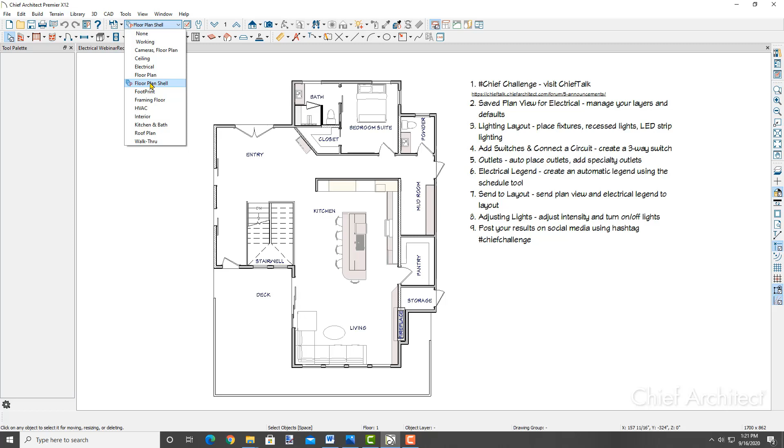So currently we are in this floor plan shell, and I'm going to change over to our electrical saved plan view. So in this electrical plan view, you'll notice that my screen has changed here. Things are turned off that you might not want to see in your electrical plan, and the things that you do want to see are turned on, such as the fixtures and connect electrical switches and so forth.

So if we take a look a little bit further into what goes into this Saved Plan View, in this drop-down menu right next to the Saved Plan View, we have an Edit Active View. So I'm going to click on that, and that will bring up this dialog box here. And I'll select the Selected Defaults panel. That's what I'm interested in.

And you'll notice here that I have a default set as my electrical, and what that means is we have these various defaults set up automatically. They're just configured so that when I draw dimensions when I'm in my saved plan view for electrical, they're going to go into the electrical dimensions layer. Text is going to go into the electrical text layer.

Markers and callouts will go into the respective electrical layer. You'll also notice at the bottom here that we have an electrical layer set, so this is where we control the display of things we don't want to see in this particular view.

Now if we click the Define button, we can go into the layer set, and this is where we can turn on and off the various things that you might want to display for your electrical plan. So I'm going to leave this as it is, click OK, and we're not going to make any changes here.

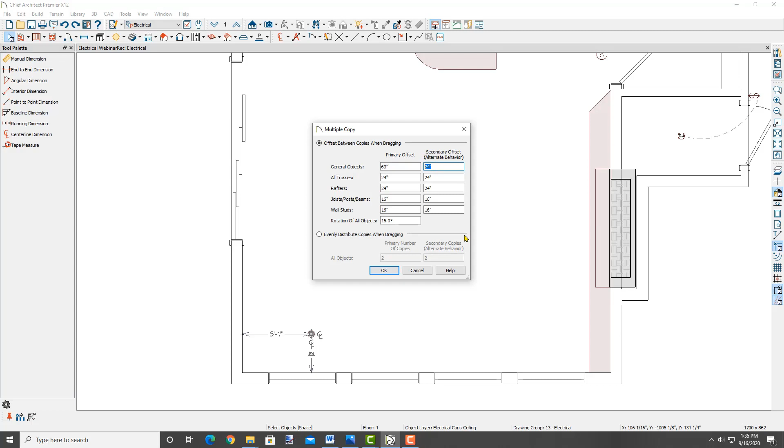The primary offset is going to be that 5 foot 3 inches, and the secondary behavior is going to be 6 feet. Okay, so when I click OK there, now I can come down and grab that multiple copy.

I'm going to drag that up, and you'll notice that I get a copy of the recessed light here and here. Then I'm going to release my right mouse button, and drag over, and I get those copies exactly at that interval.

And of course, we can confirm that if we just grab our center line dimension. I can drag a dimension down and see my 5'3" there. I can drag another dimension and see that 6 foot interval.

So that could be a handy tool when you're trying to lay out lights in a room like that and you're trying to figure out your spacing. For some, maybe that initial evenly distribute, and you might center that in the room and not worry about exact dimensions - maybe that's fine. If you want to go to the extra step of getting exact dimensions, using that evenly distribute and then setting an exact interval based on those measurements can be a real time saver.

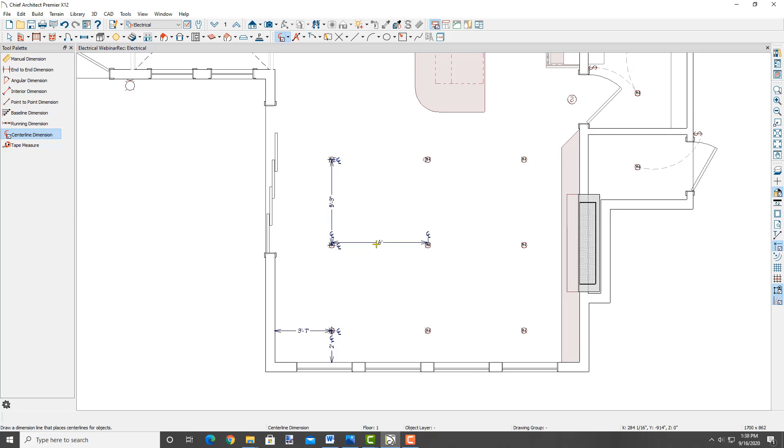Okay, so the next thing we're going to take a look at is putting some lighting over this island here in our kitchen. So I'm going to open up my library browser here. On the right hand side, I've got what looks like a stack of books, and you'll notice in the library browser we have several different layers here. We have a folder for core catalogs, bonus catalogs, manufacturer specific, and then we have our user catalog. So in my user catalog, I have some lighting already set up here.

So I often will set up shortcuts for the things that I use frequently in my designs, and I've narrowed this down to things relevant to this demonstration, specifically electrical and lighting. In my light fixtures folder here, I have a shortcut to this pendant light. Chief Architect comes with hundreds and hundreds of light fixture options in the core catalog, and you can also go out to the Chief Architect 3D library and download additional content there.

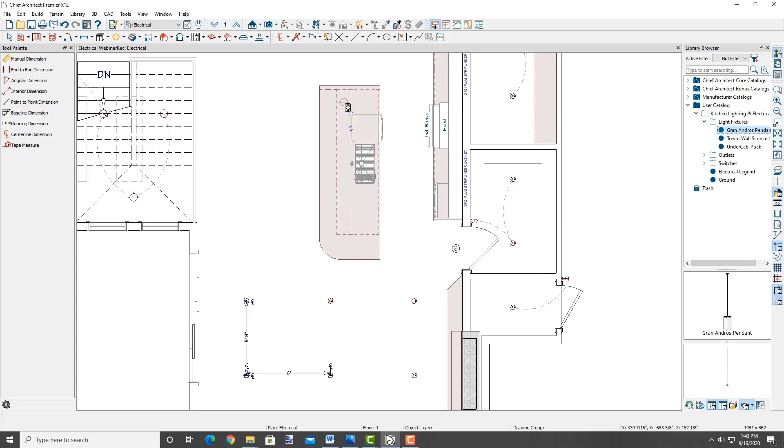So this pendant that I have, we're going to add over our island. I'm going to come into the island area, zoom in a little bit, and get a snap point to the center of this cabinet here. I'll bring that out and click, so I got that midpoint snap you can see with the blue dotted line, and I'm just going to click that pendant light down over our island.

In this case I know the interval. I'm just going to space these pendant lights out at 36 inches. With that pendant light selected, I'm going to click on my multiple copy and set that interval to 36 inches. I'll click OK, and then I can simply grab that and drag it out at 36 inches. That's good enough for our island here, and of course if we wanted to dimension that, we can do that as well.

Okay, so we've got our recessed lights here, we've got some pendants, and the next thing I want to add in terms of lighting is going to be some strip lighting, LED lighting, or rope lighting.

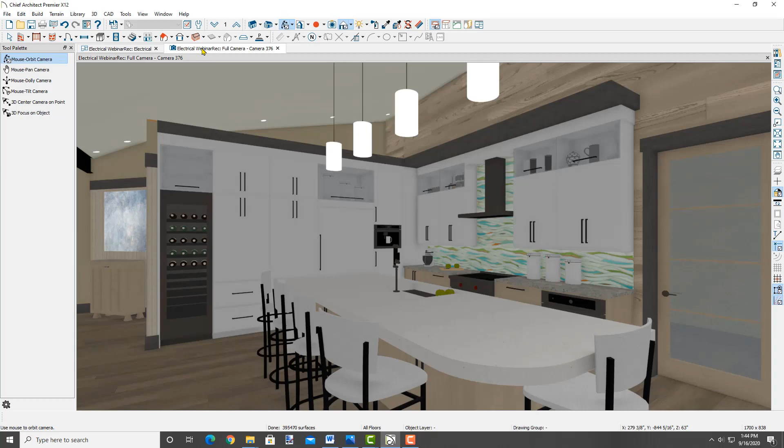Let's open up a 3D view. I'm going to close down my library browser, and we're going to create a full camera inside this room. I'm just going to drag that full camera here and have a look at our kitchen. I'm going to tile my view, that way we can see what's happening in our camera view here as well as in our plan view.

What I want to do is add some LED lighting on top here. So right along this upper soffit on top of our cabinets, I'm going to add some LED strip lighting there, and then I'm also going to add some LED strip lighting underneath these upper cabinets as well.

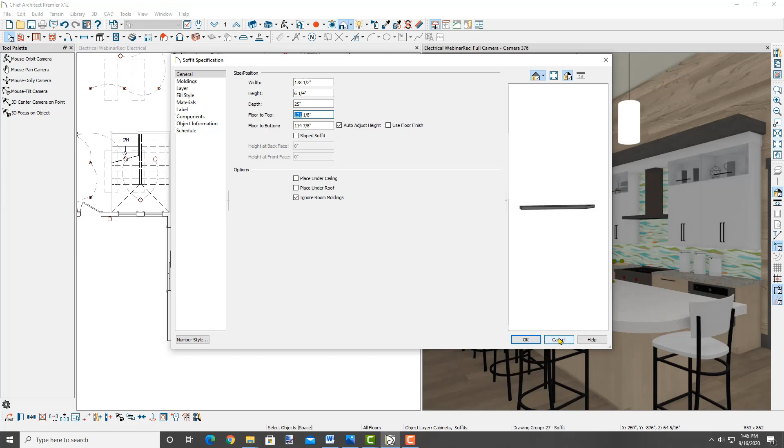So what I need to do before I do that is figure out what the height of that is going to be. I'm going to click on this soffit area and double click to open it up. I see a value of 121 here, so we'll maybe say 121 and a half is going to be the location of our LED lighting on top of that. I'll just click cancel to keep that value 121.

And then in our electrical tools, we have an option for rope lighting. So we'll activate our plan view and grab that rope lighting tool, zoom in a little bit into our kitchen, and I'm going to drag that rope lighting right along the top here. Then we're going to drag another strip of that right along here as well.

Okay, so you can see that here in our plan view, but what we need to do is set the height of that, right? So let's open up that LED strip light, click to grab that, and click open object. You'll notice here that I have the height off of finished floor set to a half inch. That was just what was set as the default here, so I know that's going to be 121 and a half inch.

So that's all set. We can set the distance between the LED lights along this path or along that rope. In the light data, we can get into how the brightness of the individual lights works as well—we'll touch a little bit more on that down the road in our presentation. For the polyline, this gives us information on the length of that.

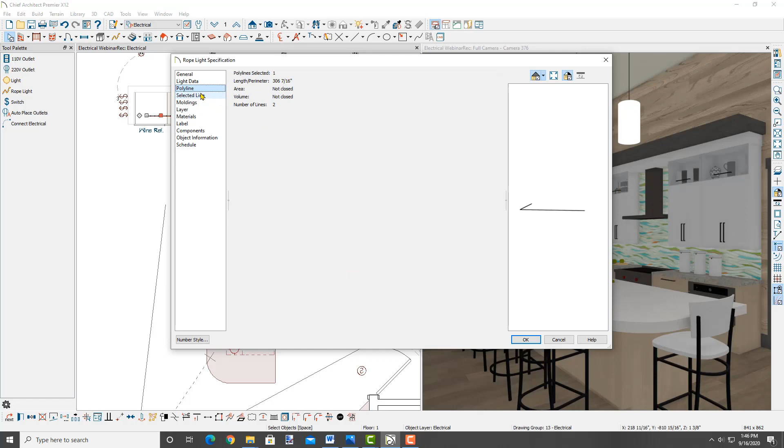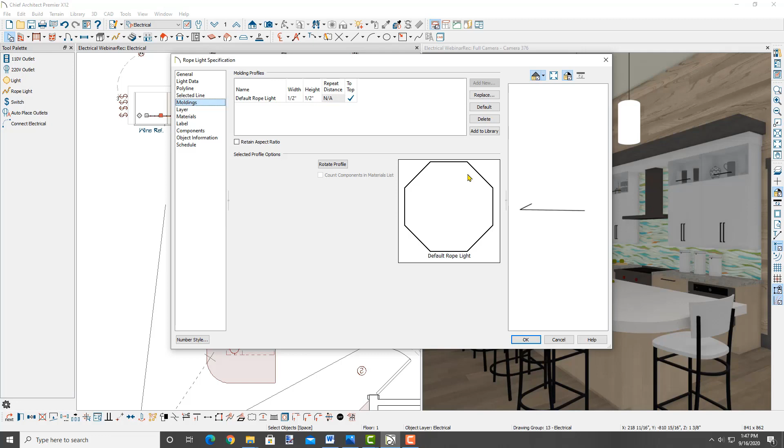And then in the moldings, we can change what that rope lighting looks like. So this is more of a traditional rope style light. If we wanted to set that to make it look more like a strip light, you can change the profile here and get the look that you need if that's important to you. So we'll go ahead and accept the changes that we've made there and click OK.

Now just to verify that we have that up there, I'm just going to pan that down, and you can see already on top of that that we have that LED lighting in our render view.

Okay. All right, so the next thing we're going to do is add some strip lighting underneath our cabinet. So this is going to work in pretty well the same way. So we'll activate our plan view, get into the strip lighting, and we'll click that here.

And now that I have that set down, I like to copy that onto the other side since we have a very similar configuration. So with that selected, I'm going to click on the copy and the reflect, and we're going to reflect that right around this range hood area. So I have a copy of that rope light right on the other side. And then again, we'll need to set the height of that.

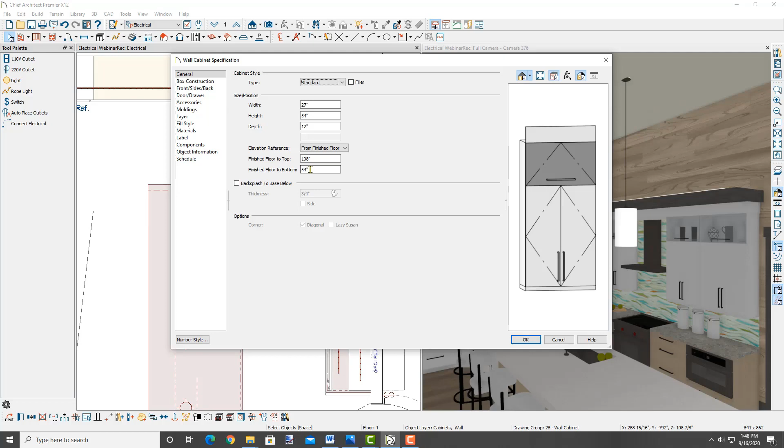So let's click on an upper cabinet and see what we have in terms of the height. We'll open up that upper cabinet, and we're looking for the elevation or the height of that off the floor from the bottom. So we have 54 inches. So I'm going to call that maybe 53 and a half. Should be okay for the height of that strip lighting.

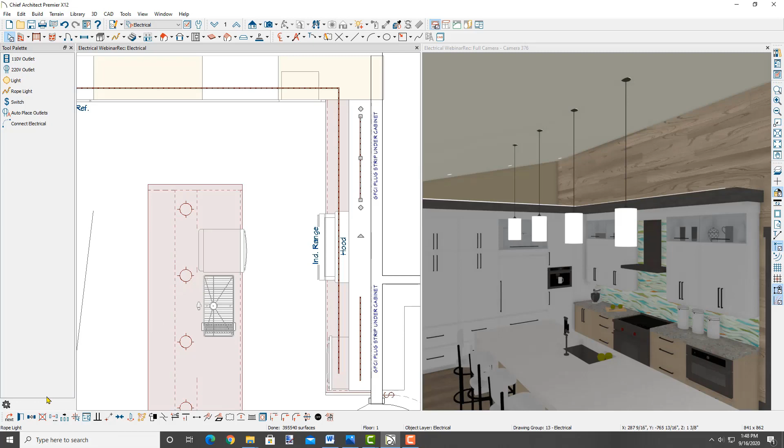So I'll click on the strip light here, open that up, and let's make that 53 and a half. And since we have another one to do, I could have done that before I did my copy. That would have been smarter. But we'll go ahead and change that here, open it up, and we'll paste that value in as the height.

Okay. So we'll double check that we can see that on the bottom of our cabinetry, and in fact we can see both strip lights there in this 3D view. Okay.

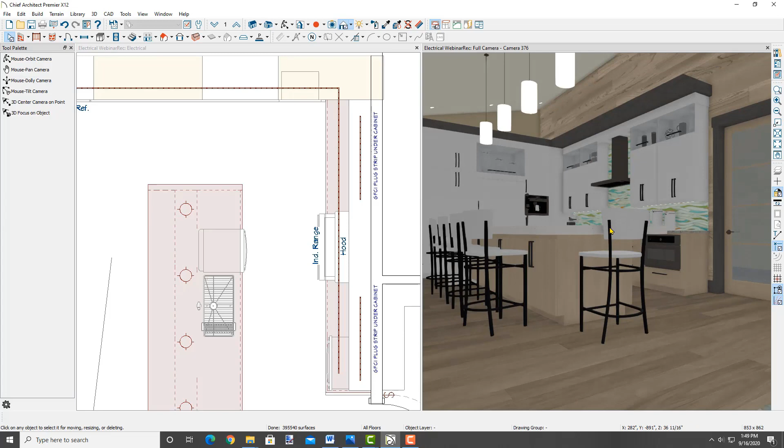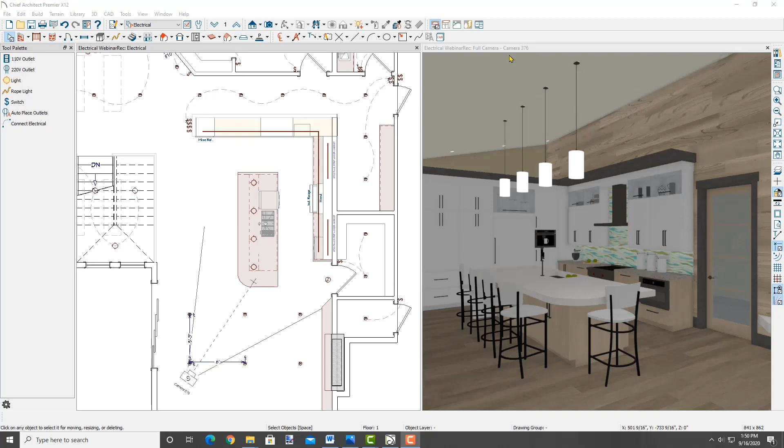All right, so the next thing we're going to look at is adding switches. So I'm not going to go through and put in our recessed lights in this area just because we're limited on time here. And I'm going to move on to adding some switches and showing the connect electrical for our lighting plan. And let's go ahead and expand our plan view here, and we'll zoom out a little bit.

And I'm going to close our 3D view. And I'm also going to just delete these dimensions that we have here just so that's not cluttering up our view. And I'm going to go up to our electrical tool and I'm going to grab a switch.

So for adding switches, if it's a single, double, triple gang, typically you're just adding multiple switches on, and you just add a secondary switch right next to it. If you want to change the position of that, of course you can click on it and move that over. We do have single and double gang switches that you can use out of the library, but I typically just add those in as single switches and move them closer to each other.

I'm also going to add a switch over here just to highlight a three-way, how that works. So we'll get our switch and add another switch, and this is going to be for controlling our recessed lights here. So for connecting our electrical, now that we have a couple of switches in there, under our electrical tools, we have a connect electrical.

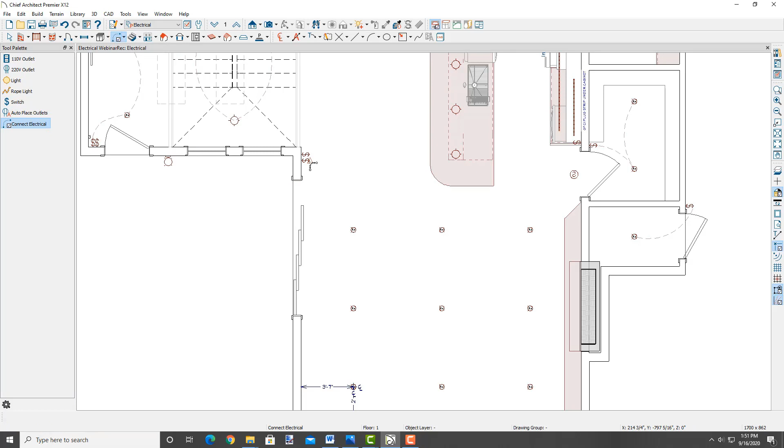And that allows us to hover over the switch and come down to the first recessed light. And then it's just a matter of quickly dragging that and connecting electrical between all of the recessed lights that are in this circuit. So just going to quickly do that for this bank of lights. Of course, if we want to change the arc on these, we can select that and just grab this diamond here and change the arc if you'd like to on individual ones or other ones.

And then if we wanted to create another switch on this side that connects this bank of lights, it's just a matter of grabbing the connect electrical and choosing any of the lights in the bank. You can just grab and drag that up to the switch. And then when you do that, the program will recognize that these are all connected. It'll automatically put a three-way marker that will show up in your electrical legend as well as your material list.

Okay, so a couple of other switch options here. Again, if we wanted to do that for our island, we can just come up here and grab and connect the electrical for the pendants that we put in. So I'd like to add a switch in for our garbage disposal and also a receptacle or a plug for that. And then we're going to get into adding receptacles into our plan.

So I'm going to open up my library here. And again, I have some shortcuts. So I'm going to close down my light fixture and then go over to my switches. So I have a few standard switches that I have in my shortcut list here. One of them is an air switch that goes into a countertop. So with that selected, I'm going to come over and just drag and click a switch into this countertop. And let's move that switch and put it over here next to our sink.

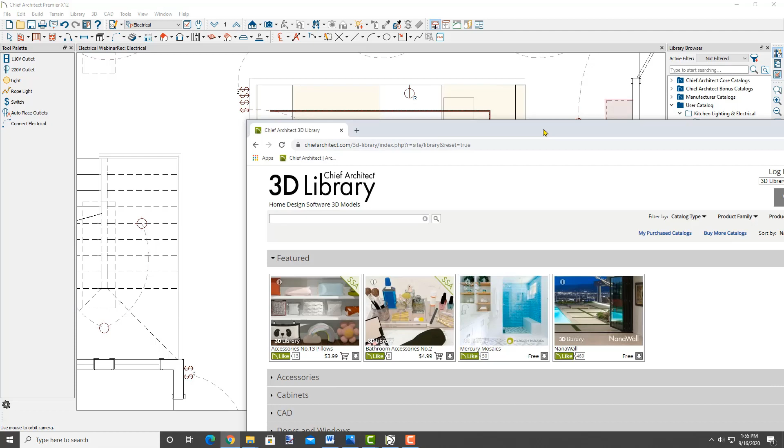So I mentioned downloading additional content. So let's open up our Chief Architect 3D library. I'm going to bring that over real quick just to show you. So at chiefarchitect.com in the 3D library, if you scroll down, we have categories here, and I'm looking for the mechanical, electrical, and plumbing. If we expand that, I wanted to point out a couple of things here.

We have specialty decor style receptacles, and these have USBs built in. So this is a catalog that you can download. If you have SSA, you can download that for free. And then we have our specialty electrical right here, which has some nice custom plugs for things like desks that include multiple plugs as well as USB. So that's a nice add-on.

And then for the international customers, I know we have lots of those in our webinar here. These are electrical outlets that are specific to international standards. So great to download those. And again, in the Chief Architect library under our core catalogs, under electrical and plumbing, and then electrical, you'll see specialty outlets that are found in this category right here: floor, ceiling, and surface mounted. Okay.

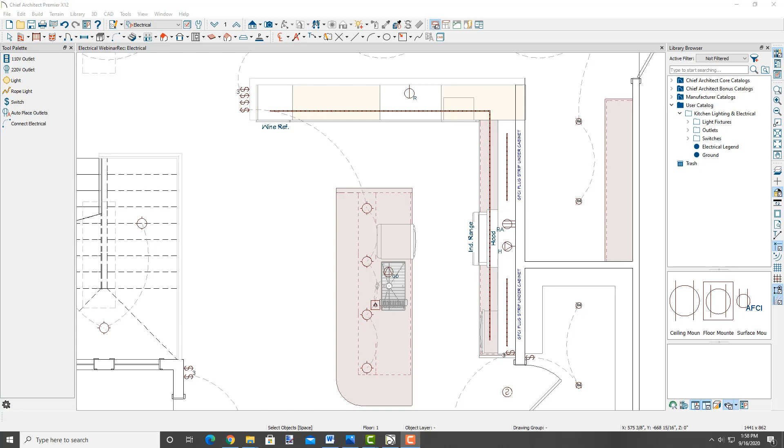The next thing I wanted to talk about is adding our standard receptacles or outlets in. So I'm going to zoom out a little bit so we have a broader view of our floor plan. And under our electrical tools, we have our 110 and our 220 outlets. And we also have auto place outlets. I use this a lot. It's a great tool for saving time.

So if I click on that tool for auto place outlets and I come up, say, to this bedroom up here, all I have to do is click once in that room, and it's going to add outlets in, and it's going to do the best job it can at spacing those out per code. And when you click on an outlet, if you want to change its position slightly, we can grab and move that around, slide it up or down, so you can adjust where those outlets are located.

If we click on that auto place outlets in a room like a bathroom or a kitchen, say I click it in this bathroom, I'll zoom in here. You'll notice that it detected that this is a bathroom, and it placed an automatic GFI over the cabinet that's in that room. So it's handy for making sure you get your GFI outlets there.

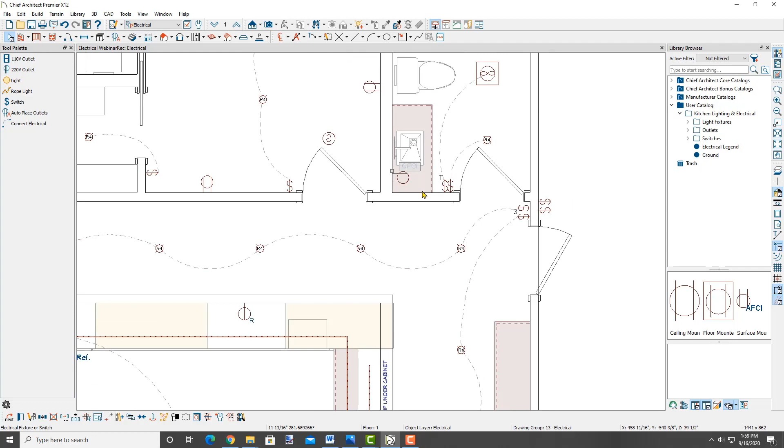Now if I use that same tool and click it in the room that we have over here. You'll notice in this area that I have a room divider that's dividing the kitchen and the living room here. I also have a room divider that's dividing this hallway with this area of the house, and then this hallway as well.

Now you might think when you click on the electrical auto place outlets, and I just click in this room that's down here, that it would just place outlets in this area. It does not. It will place outlets throughout this entire area. So as long as there's not a hard wall between the rooms, it will place outlets in this entire open area. And the reason that it does that is it wants to maintain spacing if there's not a wall.

So in other words, if I had a line divider between these two areas here, it might put an outlet here and an outlet here, and they're spaced too closely together. So just wanted to point out that behavior, and that auto place outlets can really be a great time saver for you to get those in there.

The connect electrical does work for outlets as well. I don't typically get to that level of detail in my plans, but that is an option. You can also add low voltage things like speakers that are in our library. You can connect the speakers using the connect electrical tool. So these are all options to get into in your electrical plan. And then of course cable connections and data wires and stuff like that can be added as well.

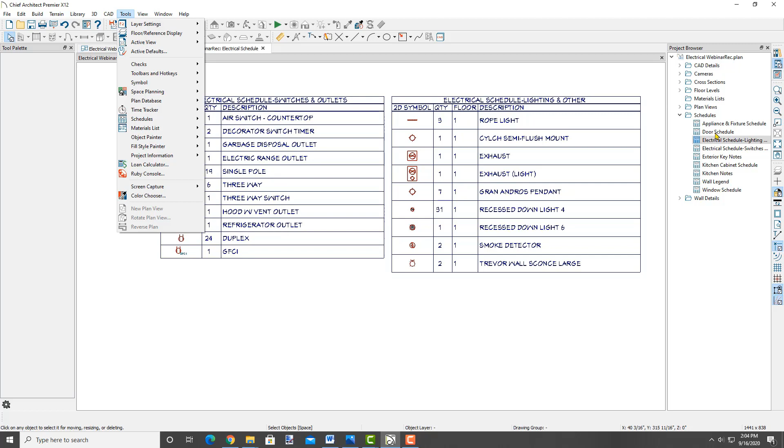So what I'm going to do is close our library browser and open up our project browser. And in the project browser we have a listing for schedules, and I'm going to open that up. In our schedules I have an electrical schedule already set up in here. So I'm just going to double click on that to open it, and show you how this works. When we place a schedule in Chief Architect, the way that we do that is under our tools, under schedules, and then electrical schedule. When we click to place that, it's all automatically going to show up in our project browser under schedules.

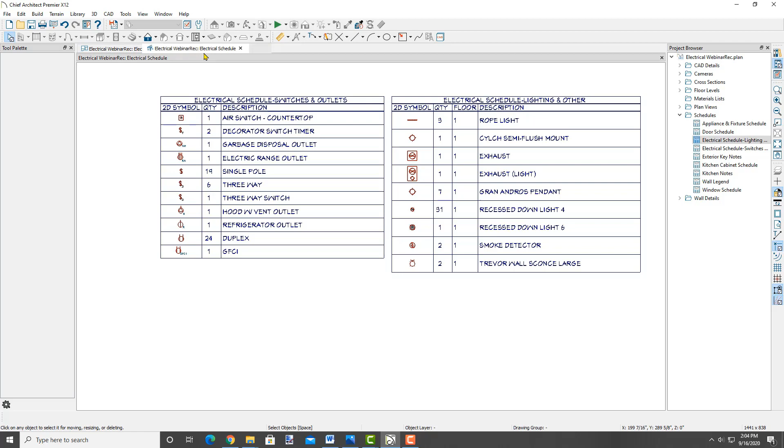And I have two schedules that are already configured here for this project. I have an electrical schedule for switches and outlets, and then I have an electrical schedule that has lighting and others. You'll notice that it's already pre-populated, and the items on this schedule correspond to what's in my plan. So for instance, if I remove this exhaust light right here, let's go ahead and tile my view. I know that exhaust fan here is pertaining to that item. If we click to delete that item, that's going to automatically update in our schedule.

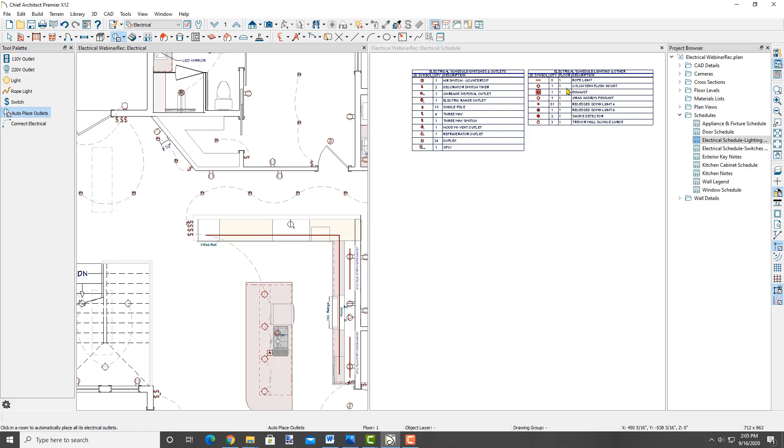So that's why I typically like to use schedules to create my legends, because I know that they're not going to get out of sync. And I'll show you how the text-based schedule works in just a moment. Okay, so the way that I created these two so that we have different schedules, you'll notice that if I go up to my schedule tool and I just place a schedule for electrical and I don't make any modifications, I'm going to get a long schedule that includes all of the items by default.

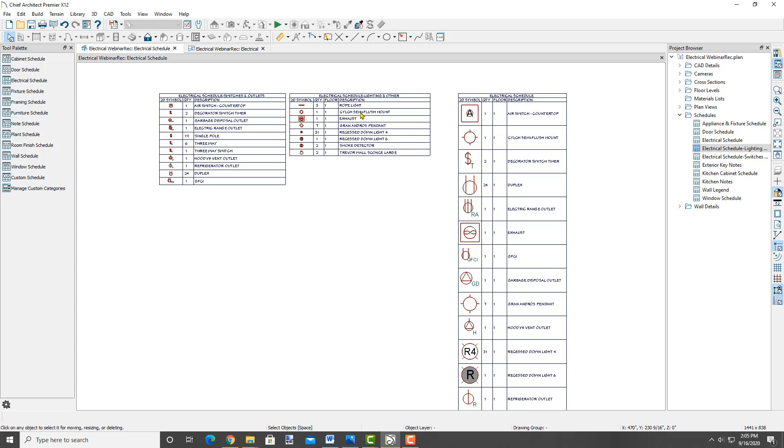And if we want to make changes to a schedule, we can just double click it. This is what I've done for these, and I can uncheck, and let's say I want to make this schedule only deal with outlets. So I can check only outlets here. The 2D symbol is fine. Quantity, floor, and description are the other columns to include.

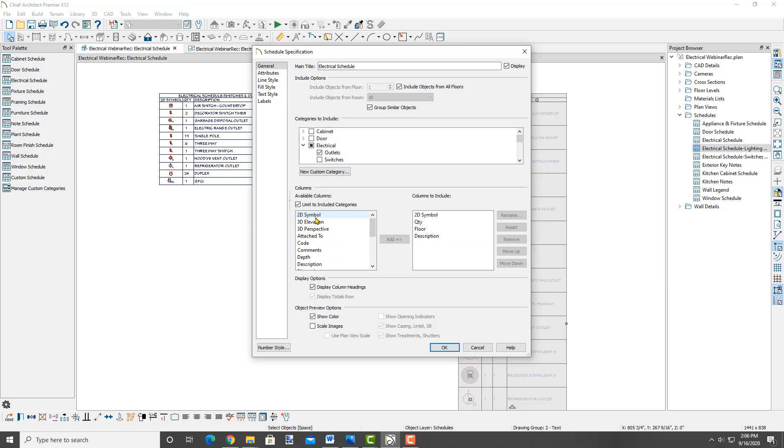We have others here that we can add as well. And then I'm going to click OK. And that's going to show me a schedule that just has the outlets. Okay, so you can break this down into different categories, switches, lighting, fixtures, or you can include them all in a single schedule.

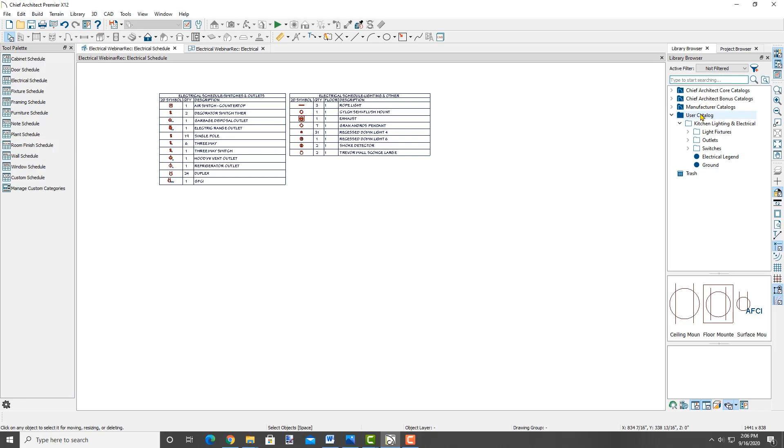Okay, so the other way that this can work is using a text-based schedule. And in our library, we have an example of this that you can use. I'm going to open up our library here. And in my user catalog, I have an electrical legend here as an example. And I'm going to drop that down just so you can see it. So this is a text-based schedule. So this isn't necessarily smart.

So if I go through and I remove that exhaust fan light, that's not going to update on this because it's text-based. In fact, when I drop that in here, it's an architectural block. So we can select that and explode it using the explode tool in the edit toolbar at the bottom. So now we can edit individual objects here. So if we don't have that fan light, we can delete that from our list.

Obviously this is a more manual process for creating a legend, and you have to be careful if you make changes that you're updating your legend manually, but it is an option, and it can look nice where you have all your recessed lights here in a row and you call them out. Might be a better way of displaying that for some people.

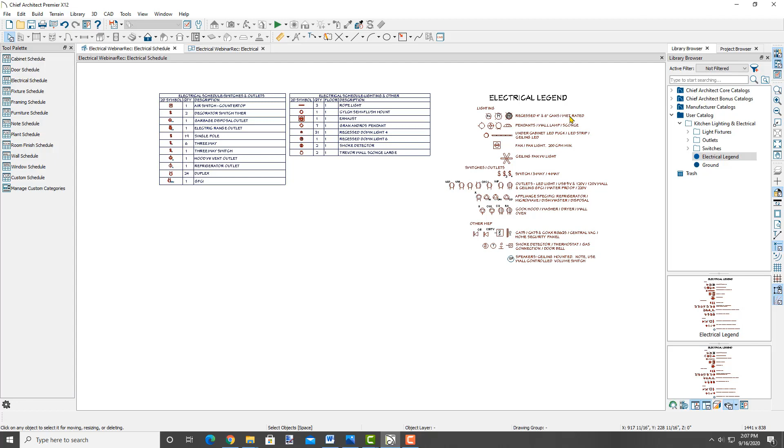So once you make changes to this, of course, you can group that back together. You can add it to the library and use it in future plans. But we do have this legend. If you just search legend in our library in the Chief Core catalogs, you'll find a legend in there for your use.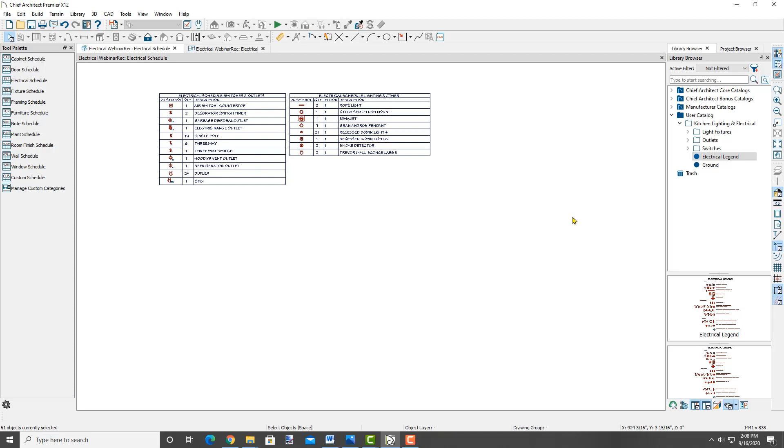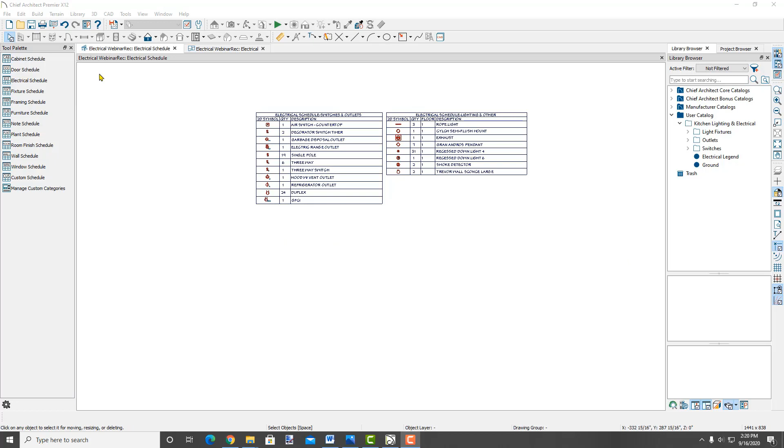Okay, so the next segment we're going to get into is just touching briefly on how to create an electrical plan, so how to send these out to our layout pages. So what we'll want to do is get back into our plan view. So I'm going to select our plan here, and we'll zoom out a little bit. So we'll say that our electrical plan is complete and we're ready to send this out to our layout page. So we're already in our saved plan view for electrical. We're happy with what's turned on and off, and we want to send this out to a layout page.

So up in our toolbar here, we have a button that says Send to Layout, Control U on the keyboard. And if we click on that, we're going to be prompted, what page do we want this to go on with our layout? So this is a new layout. We're going to just put it on page 1. We can choose send options. Do we want to do the entire plan view, the current screen? I usually do the entire plan view, but in this case we'll just do the current screen, and we'll adjust that layout box when it gets out there.

And then the other thing I'm going to take a look at and confirm is the scaling. So because this is an overall larger plan, it's not just this kitchen room that I'm showing, I'll go ahead and stick with a 1/4 inch scale. So when I click OK, that's going to put this view out to our layout page, and this is our viewport. When I select that, we can grab the edges and drag in the edges as far as we want.

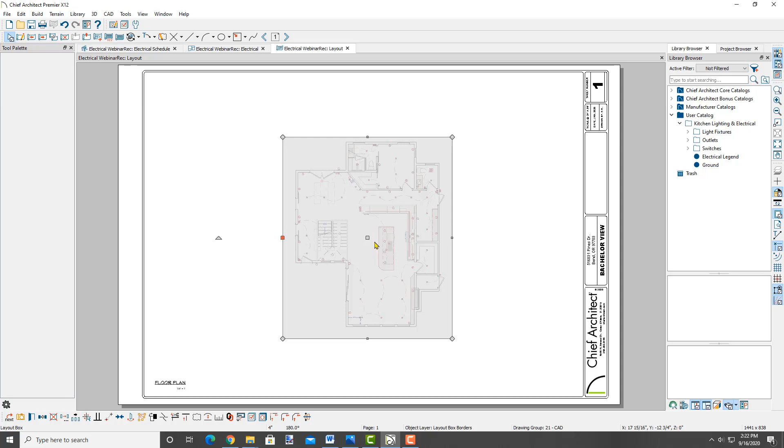In fact, if we wanted to just get into our kitchen area, of course we have that option to do that as well. So we'll go ahead and keep that entire plan on here, and then we can arrange that on our layout page. So maybe I'll put this down here next to our text for floor plan, and that shows it at 1/4 inch scale already. And then the next thing we'll do is just the same operation for getting over our schedule or the electrical legend.

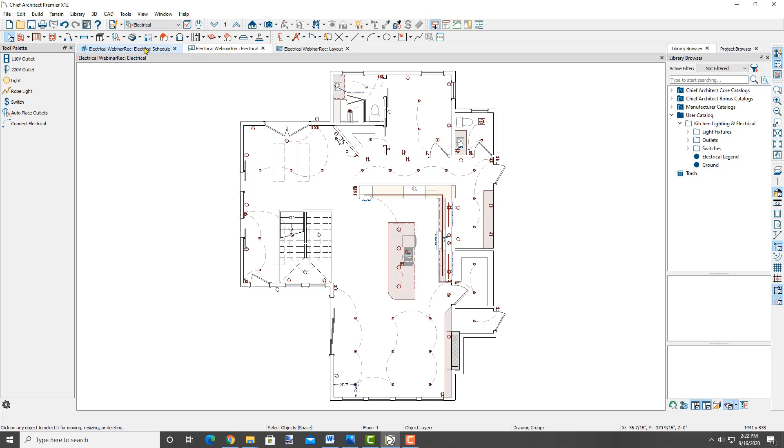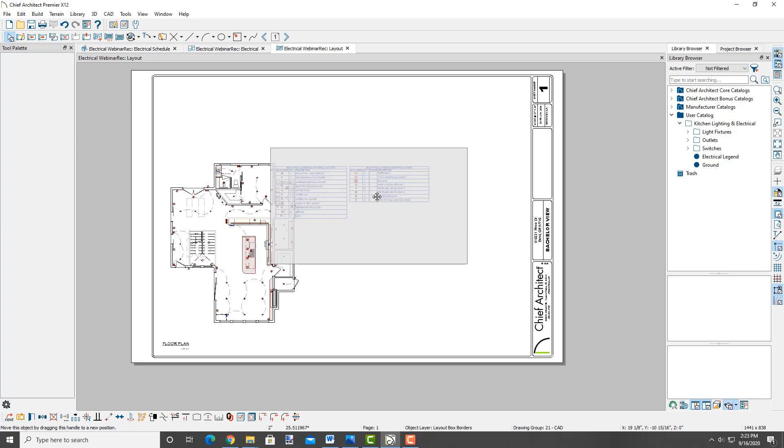So if I want to send these electrical legends over, we'll zoom in on those and again click our send to layout. We can scale this, so we'll send it to page 1, current screen, 1/4 inch scale is fine. We'll click OK. And now we have that electrical legend put over to our layout page. So that's how that process works.

Okay, so the next part of our presentation is going to just touch briefly on lighting and controlling lighting. Just wanted to show some options for that.

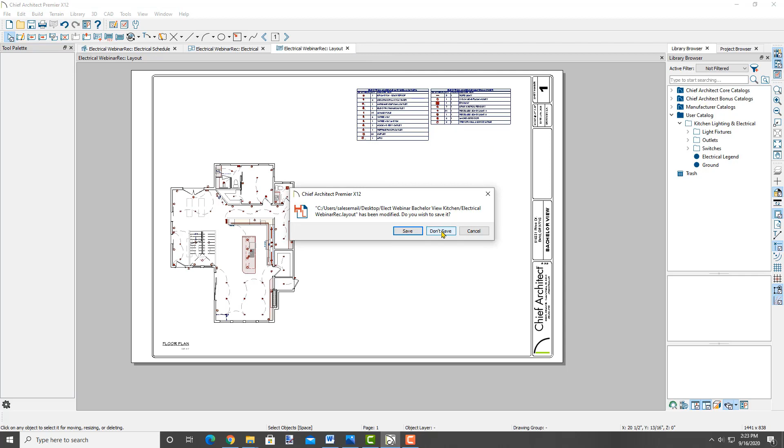So I'm going to go ahead and close this layout. We don't need to save changes to that. And we'll close our electrical schedule or legend. We don't need to save that either.

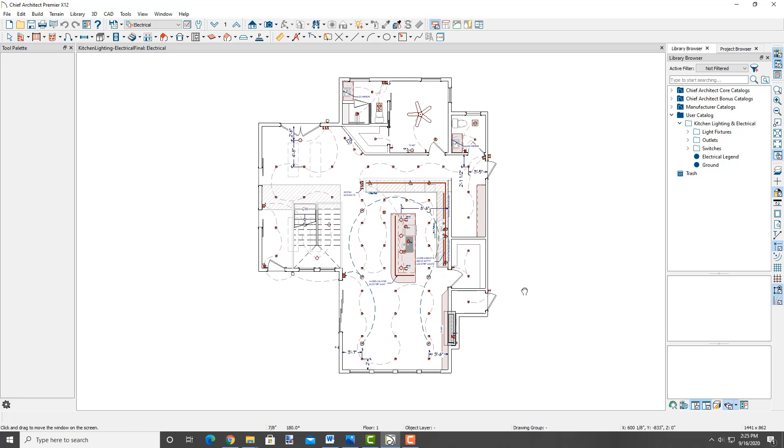I'm going to open up a completed plan here. So pull over this plan, very similar to what we've been working on, just with a bit more detail in there. And I'm actually going to switch over to our camera saved plan view, and I'm going to double click to open up this camera view.

So just wanted to touch on lighting and its importance for 3D renderings. Lighting is very important for rendering. You can see in this scene here that things are very bright and look real nice, and we're just in a standard view here. And I want to call out that lighting has become a bit less important over time.

In the past, the light sources that you have in terms of these electrical fixtures and recessed lights were pretty important for render views. They were important for PBR, or physically based rendering. So right now we're in our standard render view.

If we switch this over to physically based rendering, this is a more photorealistic view, and you'll notice the difference where you can see the light source. There's actually a strip light underneath this counter island here. There's also some strip lighting in this area here, and when I switch that back to standard, you can see that sort of wash out and you really can't pick that up.

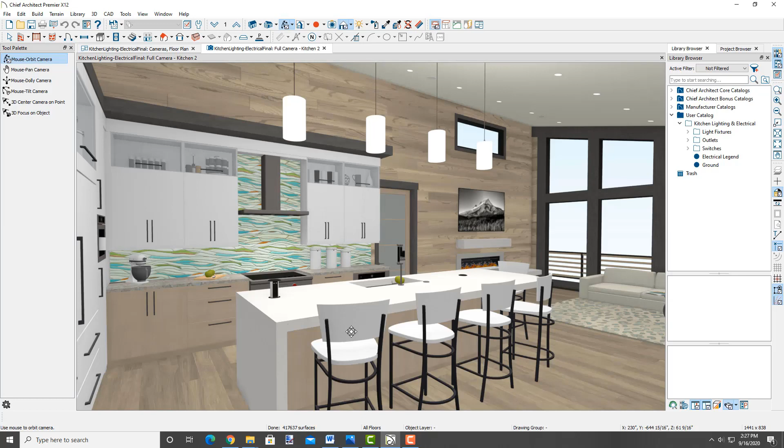So in the earlier versions of physically based rendering, if you didn't have light sources, you really had very dark scenes, and it was much like a ray trace where you had to have good lighting set up. That's become a bit less important, and I actually had some slides I wanted to show real quick just to give you an idea of what the difference might look like between the different render views.

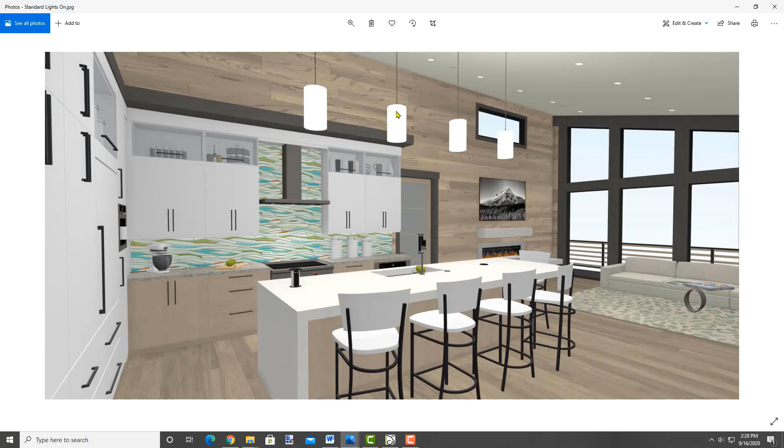So I'm going to bring up an example of a standard render view, and this is with the lights off. So standard render view, all of the light fixtures that are in here are simply turned off. If we scroll to the right, this is a standard view with all of the lights turned on. So certainly brighter, but the difference between the two renders is not a huge dramatic difference.

Okay, so the next one I wanted to take a look at is our physically based rendering. So this is physically based rendering with no lights. All the light fixtures, recessed lights, the strip lighting, everything's turned off for this render view.

If we scroll over and take a look at that with the lights on, you can see the accent lighting under here, but again, the overall scene looks pretty good because we're doing a better job with our general lighting and not needing to rely on the light sources quite as much if they're not present.

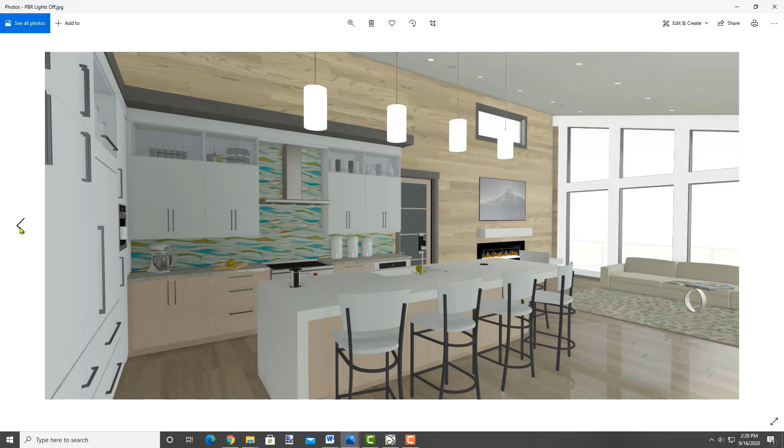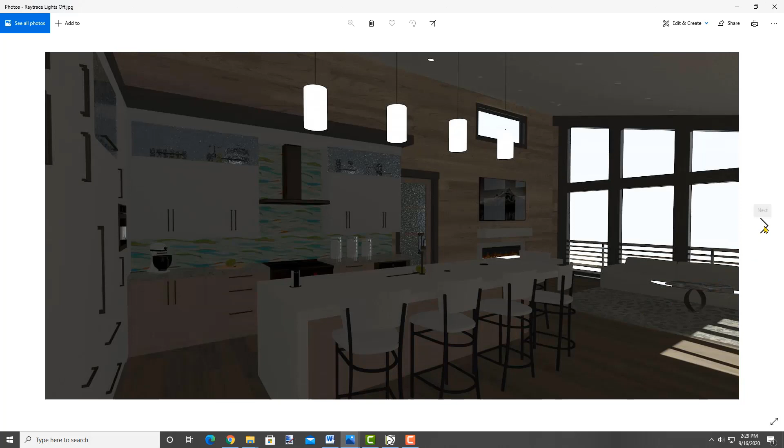Now, where this is not the case still is for ray tracing. So this is an example of a ray trace, same scene, all else is the same, all the lights are turned off, and you can really see in a ray trace that this is a pretty dark scene. And if we go to the next slide here, you can see really for ray trace a very dramatic difference between the lights being turned on and turned off.

So it's still the case that lighting in the scene is very important for ray tracing, a bit less so for physically based rendering, although you can see those subtle differences. So I just wanted to bring that up. If you're not doing ray tracing, adjusting your lights is not as important anymore. But if you are doing ray tracing, the difference between bad lighting and good lighting is quite significant.

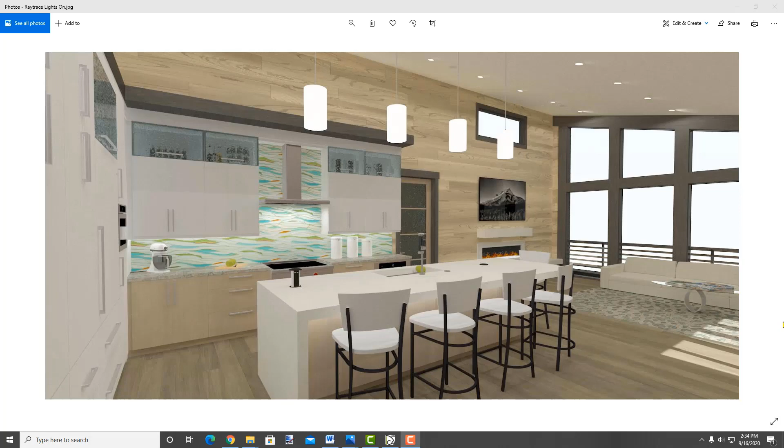So let's take a quick look at how we adjust and turn on and off lights in Chief Architect. We'll close down those example renderings and get back into our plan here. There are a couple of things we can do to adjust our lights: we can adjust the intensity of lights, meaning how much light comes off a given fixture, we can adjust the color of light, and we can also turn a light on and off.

We'll pick on this individual fixture to highlight how we can do that in Chief Architect. I'll click on it, then double click to open it up. In this fixture, if we go to the light data tab, first of all this is the light source - there's only one light associated with this. If there were multiple lights, like three different light bulbs associated with that fixture, you would see different lights there. Then we have the light source type, which is an option for a point light or a spotlight.

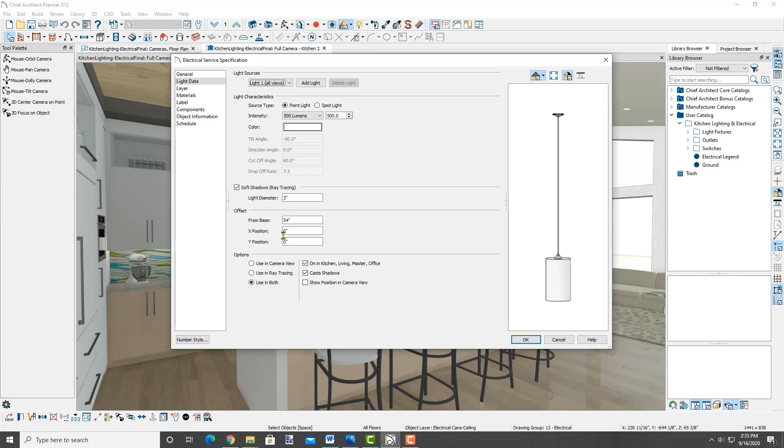Typically I use a point light - that's what most of ours are set on, and what would be recommended. This is the control for how bright that light is, and below that is a control for the color of the light that comes off it. We can also specify whether this fixture will create soft shadows in a ray trace view, and we can change the position of the light versus the fixture. So if we wanted the light source to be closer down to the end, we can adjust it left, right, up, and down using these X and Y positions.

For a light fixture, when we have that selected, we have a shortcut edit tool for turning it on and off here as well. We might be able to see that a little better with the recessed light. If we click to turn that light off, you'll see the light dims a little in terms of the recessed can light. If we click on it again and turn it on, you can tell that the light is on and off by clicking on that.

Another option we have for lighting is using our Adjust Lights tool, up in our toolbar at the top. In this dialog box, we have the ability to turn lights on and off very quickly. You also have the ability to use light sets. In this case, we have a light set up for this plan, using this kitchen, living, master, office area, and this light set has various lights that are turned on and off for this particular scene.

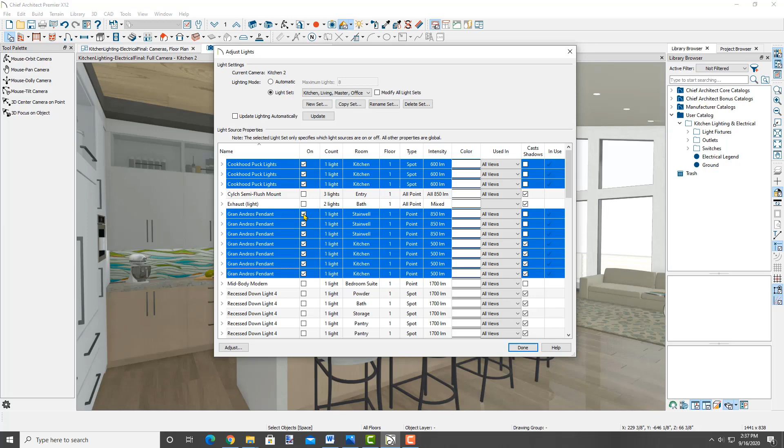You can make new sets, copy an existing set, and use controls for those. If you're into lighting, these can be very handy for controlling which lights are on and off in a given plan. A nice thing with these is that you can group select. So if we want to group select all these puck lights, we can use the control or shift option for selecting multiple items. If we wanted to grab all these pendants, we can group select those, and then if we click uncheck, it will uncheck all those items and turn them off in our plan.

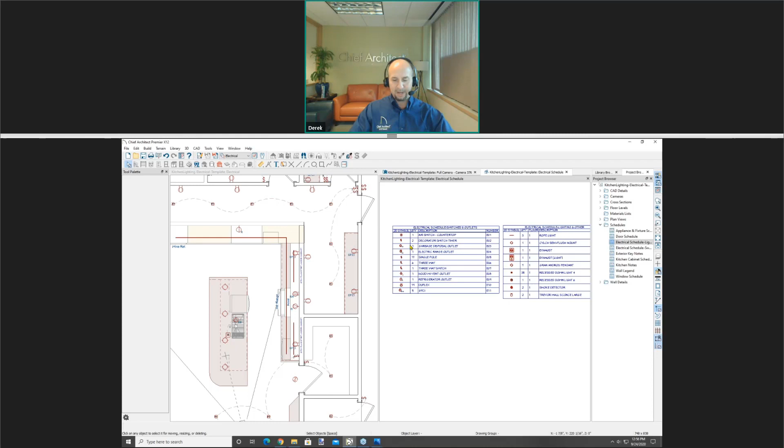Okay, yeah, I learned something new there myself. Didn't know that would work for electrical schedule. So thanks for bringing it up. Okay, thanks. You got it.

Can I ask one more? Sure thing. The kitchen and bath training class that you have in November, is that for beginners or intermediate? It's kind of both. What we do is give you quite a bit of homework to do prior to that, so really the level you're getting there is more intermediate. For the people on the lower end, more introductory, we give you homework and suggested coursework to do prior to that. So it is pretty fast moving and definitely a more intermediate class.

Okay, thank you. Hey, yeah, Derek, thanks, Ashley. Yes, can you turn on the electrical labels, please, on the floor plan? Show the little correlation between the schedule and the plan. Sure, yeah, absolutely.

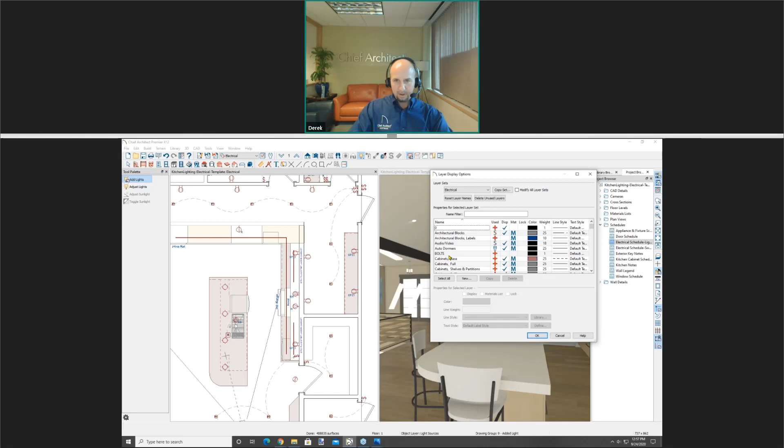Let's see here. Didn't... oh yeah, there we go. Is that what you were looking for, Al? Yeah, that's it. And you can also set these up so that you can actually show the number in the electrical schedule instead of the actual label, so you could get a straight up correlation between the fixture and the schedule. Yeah, absolutely. Thanks, Al.

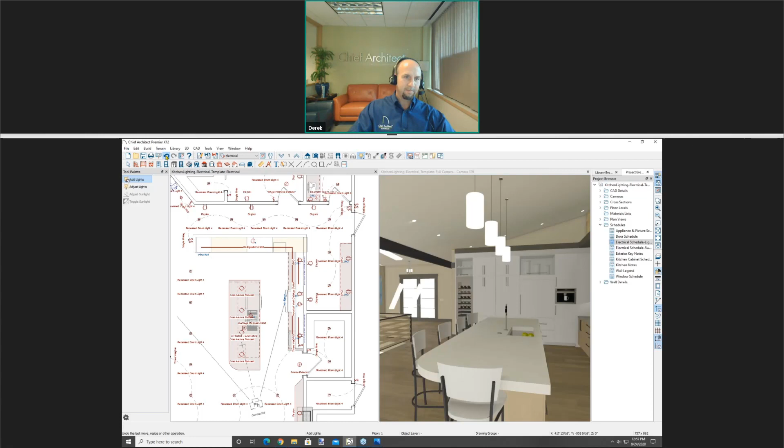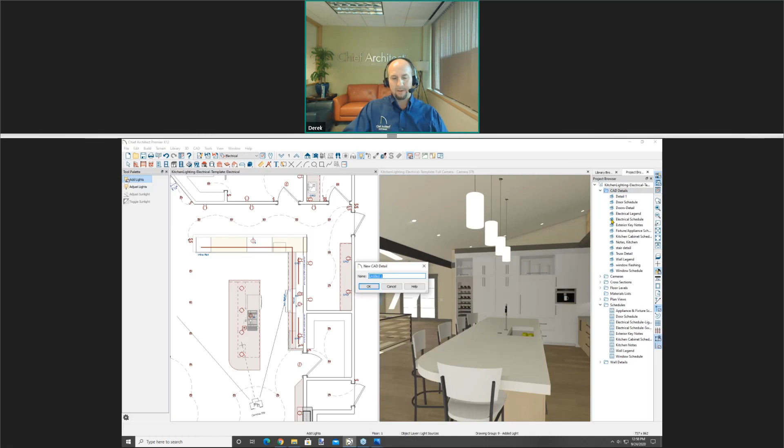Derek, since you're talking about schedules, we had quite a few people writing in and ask if you could just review how a schedule is created. Where do they go to do that? Yeah, absolutely. So let's get back into, well, what I'll do, let's close that. I'm just going to go up here. What you can do is if you have no schedules created, you might come up to our CAD details and create a new CAD detail, and then call this electrical, or just... okay.

Okay, so we have a CAD detail here that we've created for the electrical schedule. We can see it's open. Let's bring this over and make it a little bit bigger.

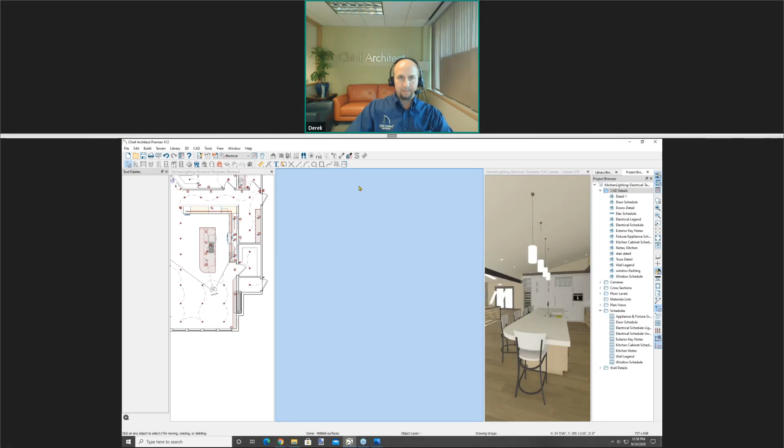In our tools we have schedules and electrical schedule, so we drop that into our plan. No matter where you drop this schedule in your plan, it's going to show up in the schedules folder of your project browser, so you can always find it there. In this case I just created a new detail for this new electrical schedule. So that's the process for adding it.

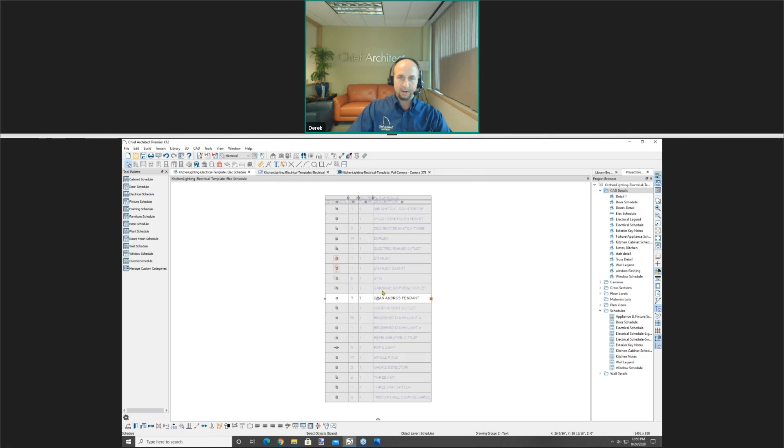Once you have the electrical schedule in place, double click on it, and this is where you can start to change the name. If you wanted to call it a legend, you can do so. We can add and remove the various columns here, and we can also drill down into the various categories of electrical, so that if you want a legend or schedule specific to outlets, switches, and light fixtures, you can do that.

Thanks, Derek. We have a question from Nancy Finnison. Hi, Nancy.

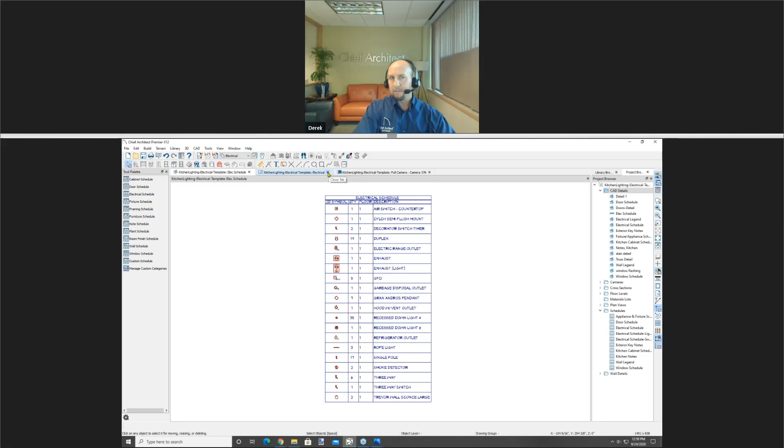Hi, I had a question. For electricians, they always want those dimensions, the placement of the lighting from the wall, which means center lines. You didn't put that on your electrical plan, and it gets really messy when you've got a ton of lights, tons of center lines and dimension lines. I'm wondering, could you show me how you're doing that to make it not so messy, and why you didn't include it in your plan?

So one reason I didn't include it in my plan is exactly why you asked the question - it can be kind of messy, it can clutter up the view. So what I usually do is put in the minimum amount of dimensions that are required.

I'm going to go up to my dimension tool and center line. I'll typically only put in a center line for one fixture. So I'll grab a center line that goes over to this wall, and a center line that goes down to this wall, so the electrician knows the location of that initial recessed light. Because these are centered in the room, I don't really need to put center lines anywhere else, because my 3.6 is the same on this side as it is on that side.

So then I'll go up to my center line tool, and maybe add a center line here and here, and that shows what my spacing is up and down. Again, I don't need to repeat that for all of my recessed lights, because the spacing is uniform in this case. These are uniform spacing as well, so I would just do a center line on this one recessed light and not worry about the others. So yeah, does that answer your question?

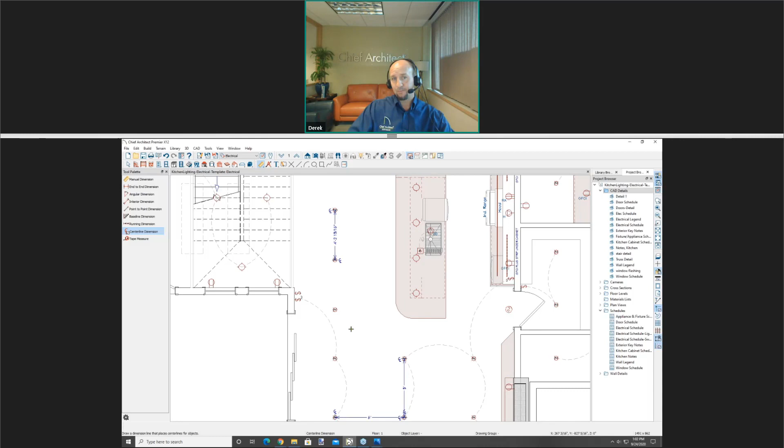Well, yes, but when they're not uniform, it does get really messy. Yeah, it does. And I don't think there's really a good answer other than putting as few dimensions on there as is necessary. If you need that level of detail, then you're going to have to deal with that.

So one thought might be, like on the layout page I created, you can have an electrical plan that shows all the connected electrical, so the electrician can see where the switches and outlets are placed. Then you can send a copy of that plan with the electrical lines taken away and just have that for dimensions. So you'd have a floor plan with all your electrical info, and a floor plan that just has your dimensions for the electrical.

Oh, that'll make it a little less messy. You're right. Okay, yeah.

So then I had another question about when you've got your rope lighting and other types of lighting, when you've got a driver for those things - how are you showing the placement for the drivers?

Driver meaning like the power supply? Yes, the transformers. Yes.

Yeah, I would just create a CAD block. If that's something you use pretty commonly, I would create the CAD block for it using a text tool or CAD tool. So I might just draw out a small box here and put text in there, group that together, and add it to the library so I can place that in my plan. It has the text along with the box, and that will show the location of that.

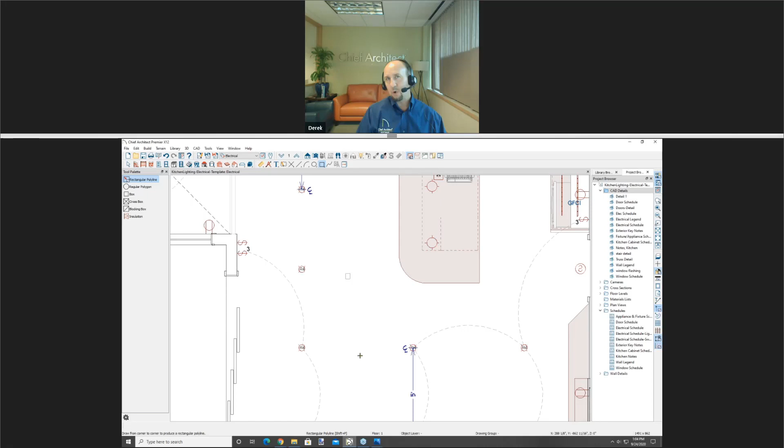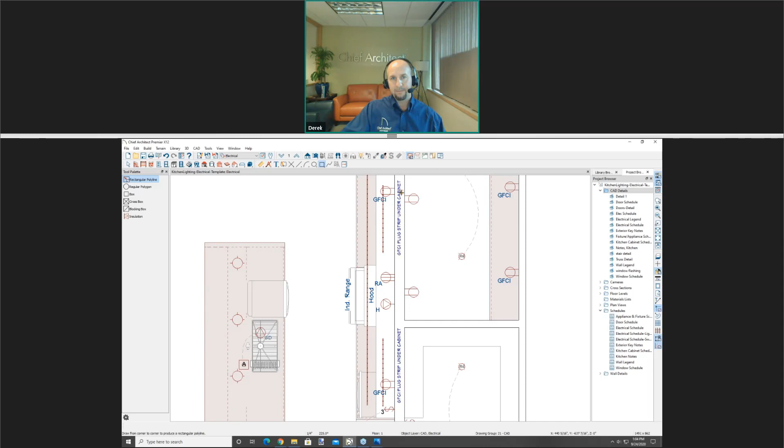So where that strip light plugs in? No, a plug mold, or it's just a power bar. Oh, yeah. So here's a for instance for that. So this particular plan, although I put some GFI outlets on the back here, I have a GFCI plug strip under cabinet. Right. Yeah. So I would typically handle that in that way.

And then again, if we had a particular outlet that you were using to basically make that strip hot, I would place the outlet and again do a text note that says here's the outlet placement that will run our GFI strip underneath the cabinet. Okay. All right. Okay, good. Thank you.

Thank you. Derek, we have a question from Gerald Teacher. Go ahead and unmute yourself and ask your question. Yes, I think my question has been answered, but I was wondering if you could create an electrical load box schedule whereby you could assign circuit numbers to a group of lights or switches or receptacles.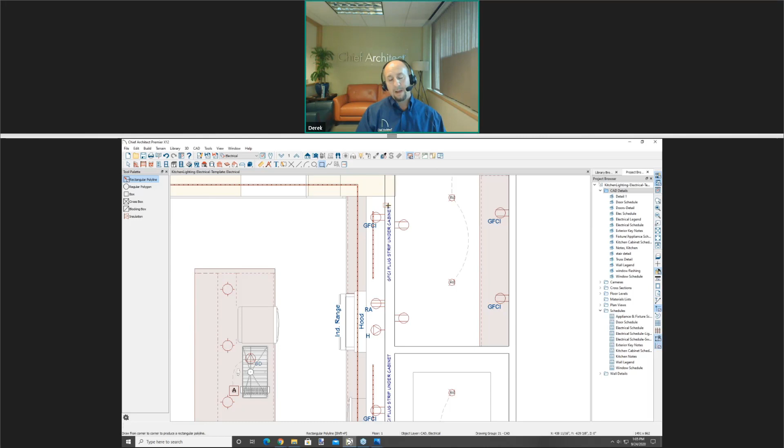Yeah, absolutely. So, it's certainly not automated, at least not to my knowledge. Maybe someone else will chime in here. So typically, if you're doing this fairly regularly for your plans, I would use the CAD tools to create a table for that. And then you can put in your columns for what you need for your electrical loads and your various circuits, what outlets are being driven and what the loads are on that. So it would just be a table that I would create, similar to a legend.

So if I bring that back up here in my library browser, here's an electrical legend. Just zoom out here. So this is text-based. So I might create something like this for my electrical load table and have CAD lines that divide that up into the various columns and rows, and then type in the information that you need as it applies to that plan. And once you create a template for that, you can add it to the library and then just drop it down into each plan and enter that information in.

Is there a way to assign the circuit number to a light or a switch and have that automatically show in the plan? Yeah, unfortunately, there's not. What you might do, just brainstorming here, let's say you're doing this for outlets and you connect electrical outlets using the connect electrical, you can color code that. So you might have orange for a given color code, and you can notate orange in your table so that it would be easy to find out which electrical circuit is which and how they apply to that electrical load table.

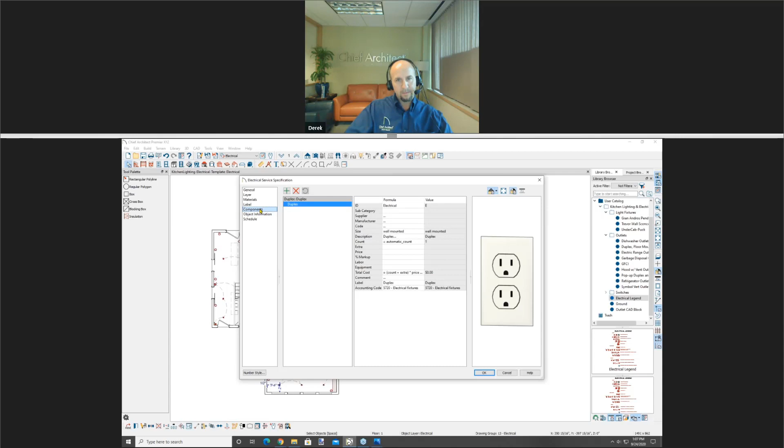Derek, just a thought. Yeah, Al. If you were to open one of your outlets for specification, you might be able to get something into either the object information or the components area in there that can be accessed from the schedule. Oh, probably object information, because that you can type in. That might be a possible way to do that. Gotcha. Okay. We'd have to check that one out.

Yep. And you can display that some way on plan? Well, what we would want to do would be to set up a situation where that would show in the schedule. And if it's going to actually display on plan, then we're going to have to actually add something to the fixture itself, which you can do. Right. But that's going to be manual. Okay, thank you. Hey, Derek. Yeah, Scott.

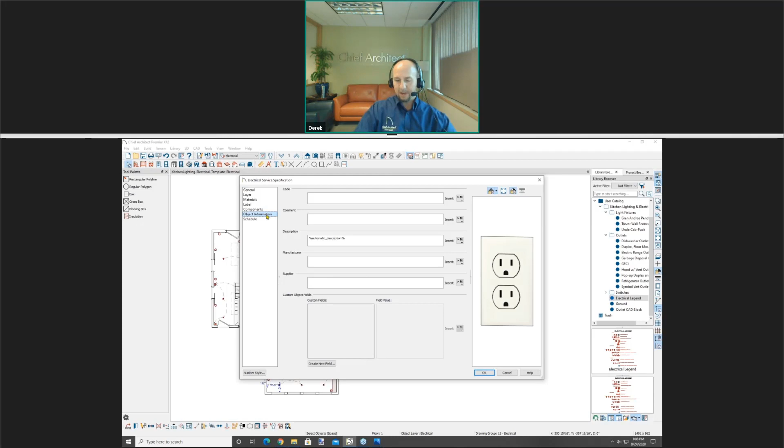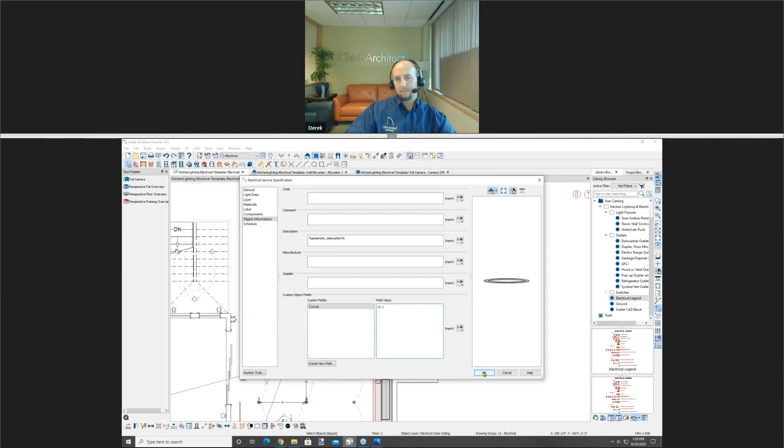If you come down to the very bottom of this and say create a new field, and we call it circuit. And then you could go in and put values in there. For example, you could say circuit 1 or circuit 2, whatever it is for this particular light. And then once you have that value in there, when you go into your schedule, you have access to that field. So you can put that in your schedule now that it's a new field, and then you have control over it. So when you open up the schedule now, you'll see this circuit field available and you'll be able to see it.

So yeah, there's the circuit. So you can then add that in there. You have more control over it. So if you want to add any custom items, that's an approach that you can use. Yeah, that's great thinking there.

Thanks, Scott. And can that show up in the legend for the particular light or switch? You should be able to add that in there as well. So if you have the value in there, if it's circuit 1, 2, 3, whatever, however you've numbered those, then you should be able to do it. You're probably a big macro guy, so there may be macros that you can put in there as well. So do a little investigation in there. And if you got something great, maybe share it on social media and everybody can learn from it.

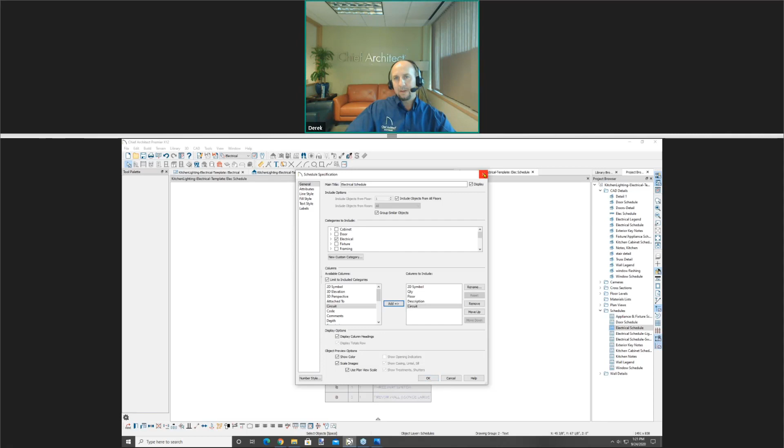Okay, thank you. Thanks, Scott. All right, we'll check in with Cynthia Walden. Hi, Cynthia. Go ahead and ask your question. Hi, I actually have two questions.

One is it's not so much for kitchens, but for bathrooms. I frequently put a sconce on either side of the mirror, and then there's maybe an outlet underneath and a switch. And in the plan view, it's just a red hot mess because you've got the symbols sort of one on top of the other. But in the elevation view, you can make it look perfect. And just wondering if you have a tip on showing that in the plan view so that it's readable.

Gotcha. So for instance, if I zoom in on this bathroom here, we don't have a lot of real estate. We have a GFI outlet. Maybe you have a sconce above that, so they're stacked one on the other. Right, exactly. Yeah, I think that kind of boils down again to similar to how to make dimensions less messy. One idea would be we can move this GFI out of the way, show the sconce, and then do an arrow that shows a GFI in that location as well.

But I don't think there's really a good answer when you have things stacked on one another. Other than you'd probably want the light fixture in its place, and if you want to dimension that out, you can do that of course in an elevation view. And I think you have a catch-22: if you're placing it accurately in your wall elevation, then your plan view is not going to look good. So it's a bit of a catch-22 on that. Unfortunately, I don't think I have a great answer on that.

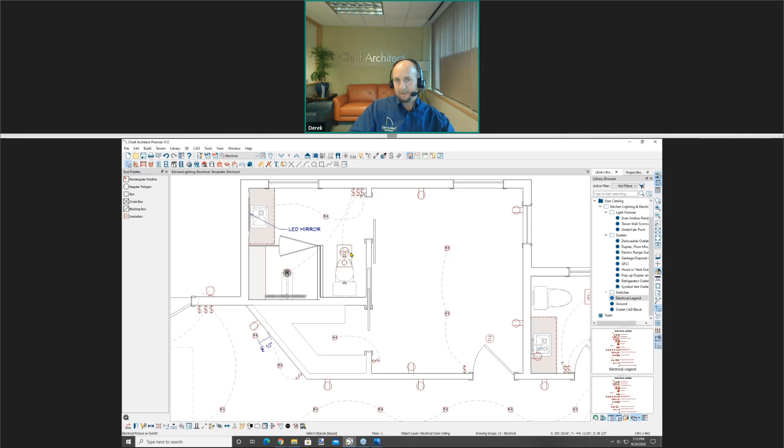Well, I think that you would probably have to create different variations of the fan so that you can differentiate between the different CFMs. So you'd probably have to create 3 or 4, however many different variations of the fan, and have those in your library. And then in the object information, and maybe Al can correct me if I'm wrong here, I would denote information here on what the CFM value is, and then that can carry over into your schedule. So I think that's how I would handle that part.

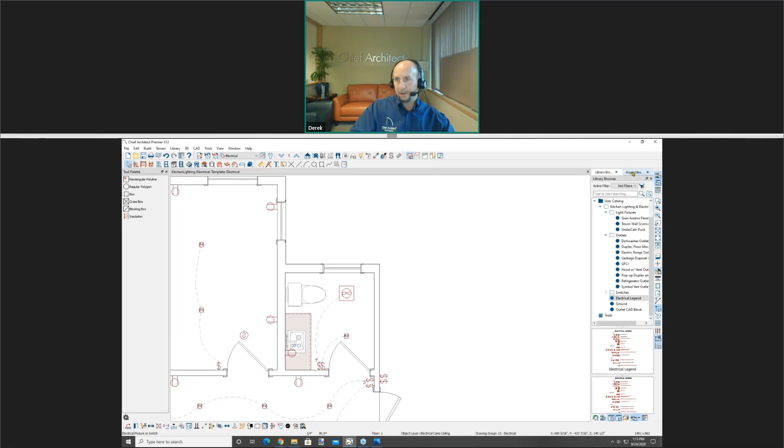In terms of the light fixtures, let's go into our library here and our electrical legend.

So if you're using a wet rated or a vapor proof fixture, we do have those objects in the library, and they'll show up as such. So this is a text-based legend, but that will show up in your regular schedule if you're going down the schedule version of that. Okay.

And this is where using this type of legend can come in handy versus a schedule, because you can create whatever you want in a text-based version of that, where you're kind of stuck with the library object containing the info and displaying as you want. So you might consider managing your legends that way, and it's pretty easy. You might think, oh gosh, I don't want to go down this way that's not automated. But once you get a fully built out legend, it's just a matter of managing, pulling out the things that you don't need. And then, when it's fully built out, you rarely have to add additional.

So in this case, you have 2 lights. You can create a new symbol that differentiates a 200 CFM with 150, and kind of call it out that way in this text-based legend. So I think you can probably do that in both ways.

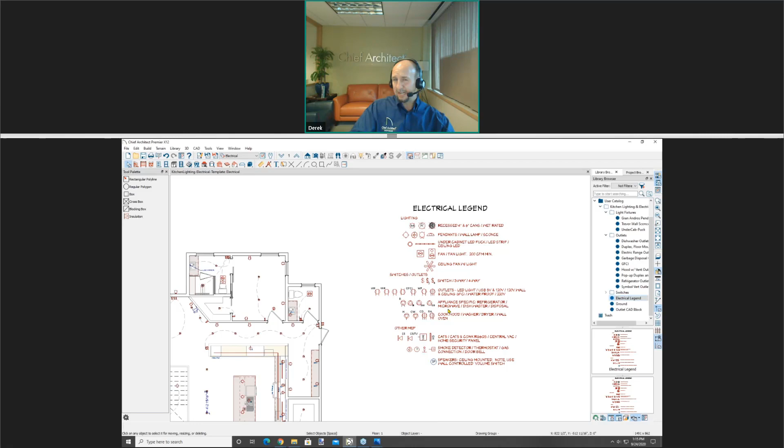Thank you. Did that answer your questions? Yes, thank you very much. Okay. Yeah. Thank you, Cynthia. Derek, it looks like we have one last question from Linda Herman. Go ahead and unmute yourself and ask your question. Okay. Yes. Hi, Derek. Can you hear me okay? Hi, Linda. Welcome. Yes, thank you.

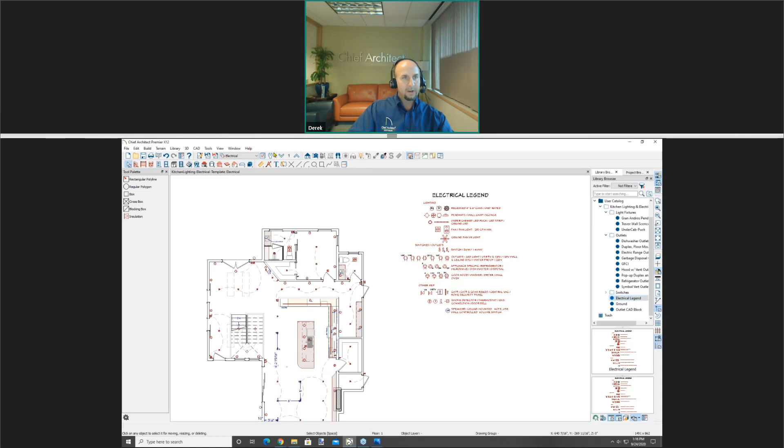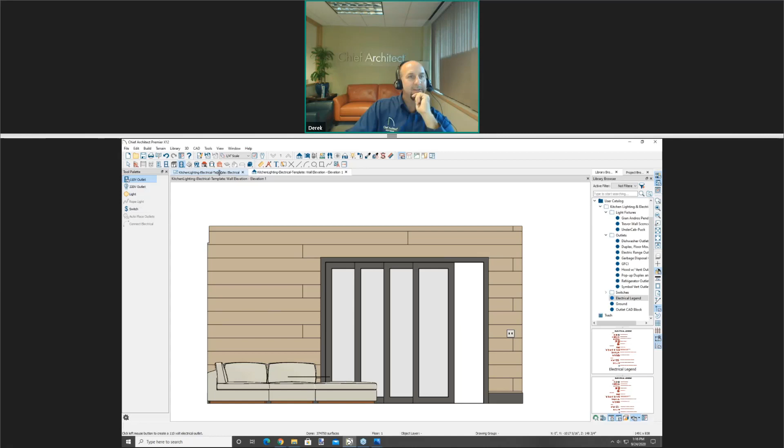Is there a way to rotate rope lighting into a vertical application? Rope light vertical. I don't see why not. Let's take a look here. So I'm going to go in and we're going to create a wall elevation. And I don't know, let's do it maybe in this living area. Might be a little easier. And I'm going to grab my electrical tool, and nope, can't put that in an elevation. So let's try and draw in a rope light in this view.

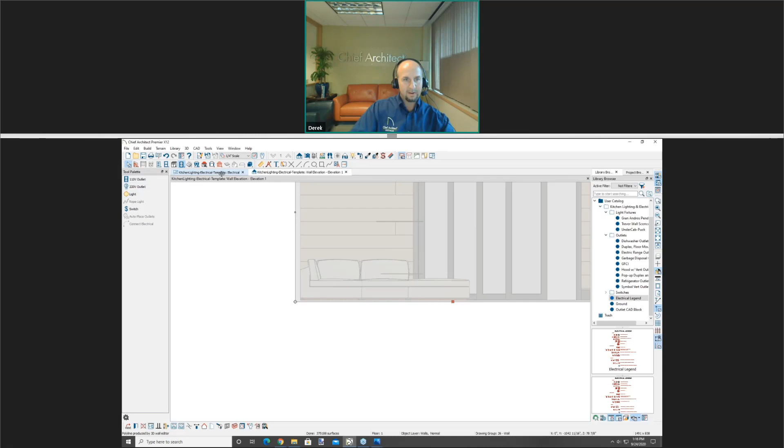Can't grab it there. Let's take a look here. I'm just going to do a regular 3D view and see, basically what I'm looking for is to see if I can select that. I do have it, and I'm not getting any rotate handles on there. Adrian, she's our content specialist. She may have some idea on that.

Yeah, I think that it is currently restricted to being horizontal only. Probably if you wanted to represent something like that vertically, you may need to just put individual light sources in your project that are very small, and you can use the multiple copy tool that Derek used in the very beginning for the recess light, and you can copy those vertically or in other directions. But I think for right now, the actual rope light tool can only be drawn horizontally.

Okay. Yeah, that's good feedback, Linda. I'll jot that down and put that in our database for a feature request. I can see how that would be useful to be able to have a vertical light. That would, yes, that'd be awesome.

Okay. Anything else, Linda? Thank you. Nope, that's all. All right. Well, thank you very much.